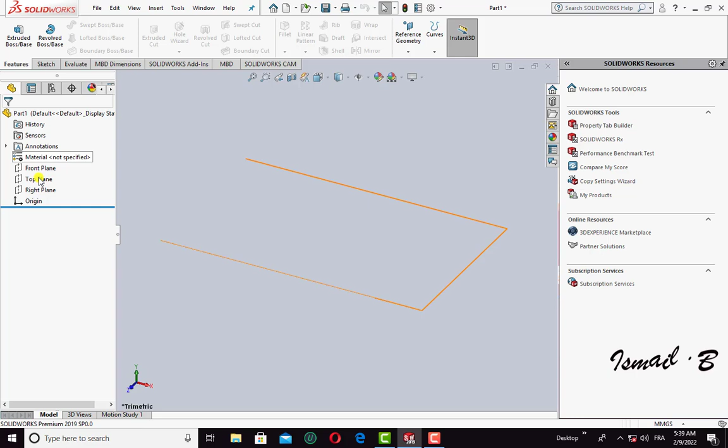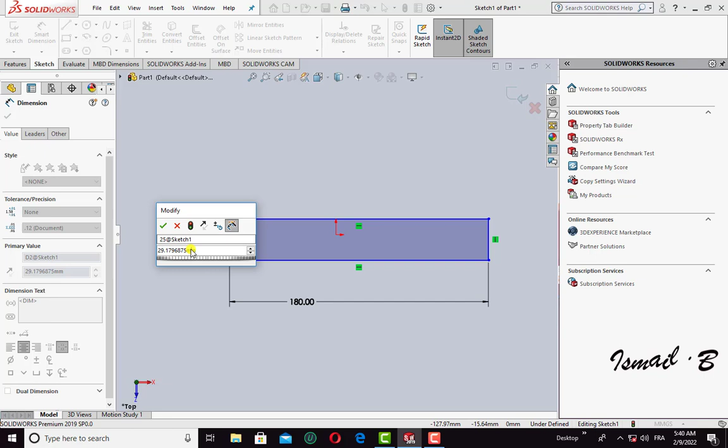So it's an easy example. As you can see, I will create a part, and this is the geometry of our part. For the length, I will give it 180, and here I will give it 25 millimeters. Okay, click to extrude to give it thickness. I will give it 10 millimeters for thickness.

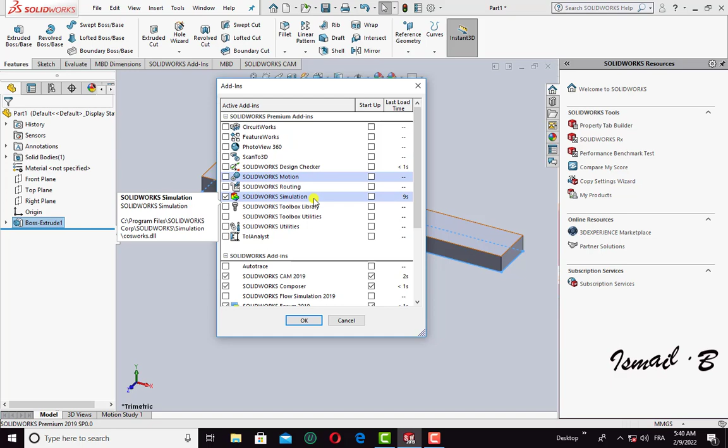Here we will go to this option to add the simulation, the SolidWorks simulation option, and okay. This option will show in this interface. As you can see here, simulation. Click to new study, and okay.

Of course it's a static study, and we have here multiple options like fatigue and thermal, okay. I will give it a material. Here I will choose this steel material, apply and close.

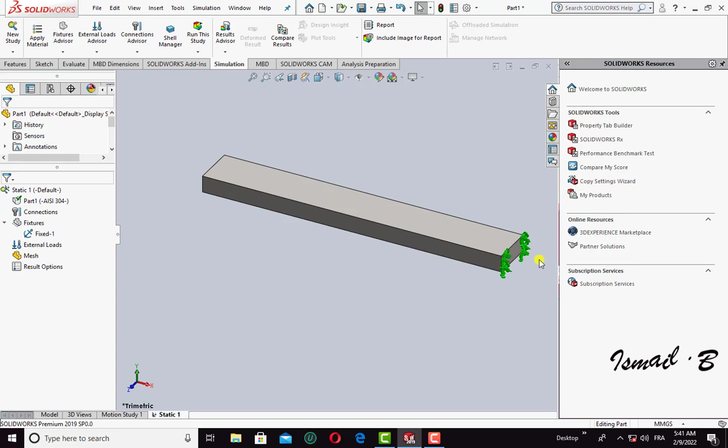After that I will fix it in one side here, in this surface. I will fix it. So okay, as you can see, we fix it in this side.

Here we will give this part force in this side, in this edge. You can select the direction with this option. Select the direction of this force, and we will choose this direction. Okay.

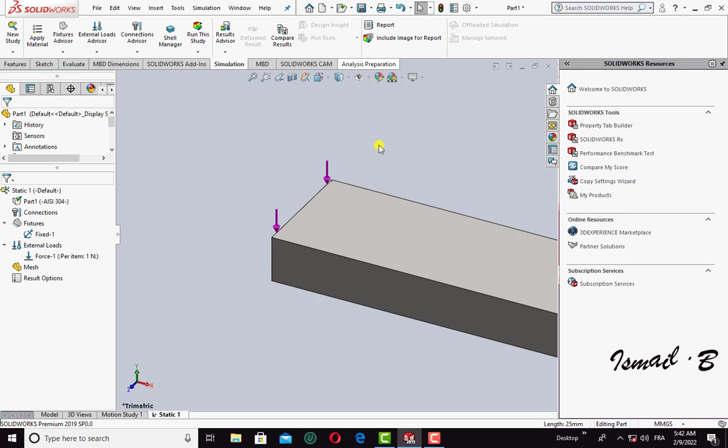After that we will run this study. This may take a while.